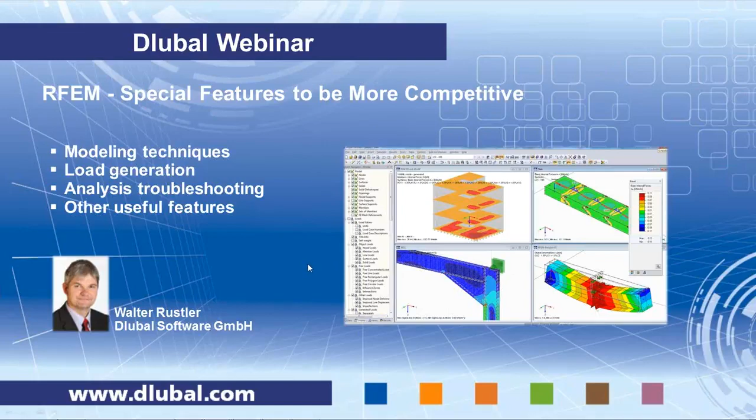With the following examples, I want to show a small selection of the special features inside RFEM. I think those features are outstanding and can increase your productivity enormously. We will go through those simple examples and show you how quickly we can model and get to good results inside RFEM. Not all features can be covered today, I only picked out a few of them. We will have time in later webinars to show you more of the features.

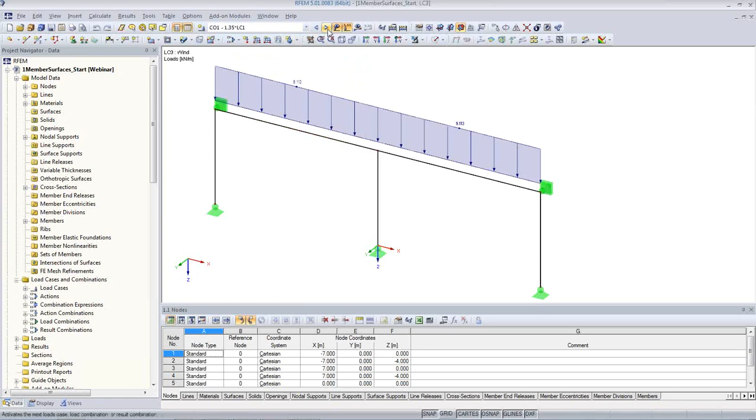It has a few load cases here, live load, wind load, and a few combinations. And at the end, we'll get an ultimate limit situation result, and we can, for example, see the internal forces.

And at the end, I performed a stress analysis with RF steel members. This result indicates a stress location here, an area of this beam where we have an overstress.

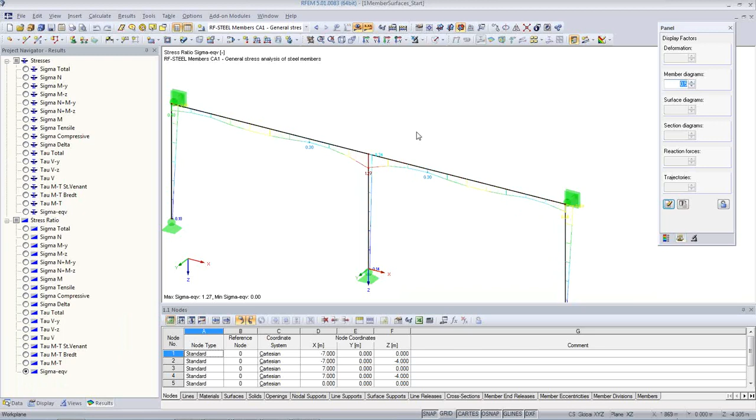I can show this here a little bit more in detail with colors. And in this area, now we have the option to increase the cross section entirely of the beam here, or we can take a closer look at this connection here, and I'd like to do this now by means of generating surfaces from this 1D beam model that we have here.

So basically we're going over from a 1D beam element into a 2D surface finite element solution. And the focus will be on how to connect the 1D beam element with the 2D surfaces and how to perform the detailed analysis here.

When we take a look at it here, this 1D element is now here only a visualization, but in reality it's only basically a line, and the beam element doesn't know anything about the details of this connection, but within the surface element we can do this much better.

So how to do this? First of all, I have to kind of isolate this section here where there is the connection. Inside RFEM, I have the option to select a member, and then if you don't know what command you have available, it's always a good idea to use the right mouse key on the selection. Then we will divide the member at a certain distance.

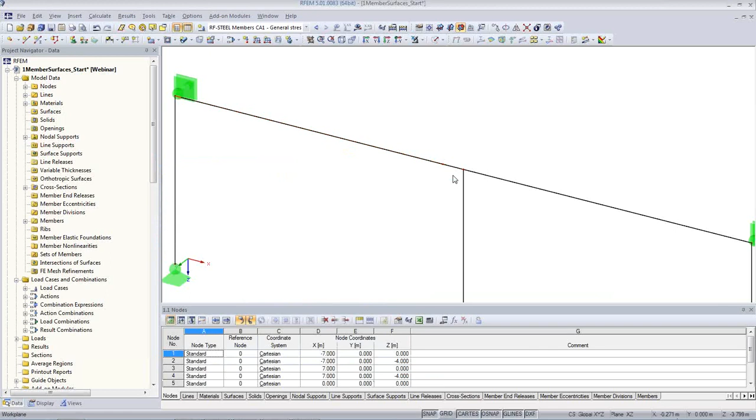Please note, while I'm doing this, I see the direction of the member in the background of the selected member, and I can see here at the member end, which is this area here, I want to have an intersection at 0.5 meters. A new node is introduced and it's automatically connected, and when I take a look at the loading situation, all the loads are changed automatically and updated, so it's also on this new member.

I can do the same thing again on the right side. This time I only have to hit the return key and it will automatically call the last command. And one more time here for the column, and I get here as well the new member.

Here we see the new members that have been created by this division process. I'm selecting it and creating a visibility by selected objects, so I just have an isolated view. Everything else is in the background and I cannot touch it or change it.

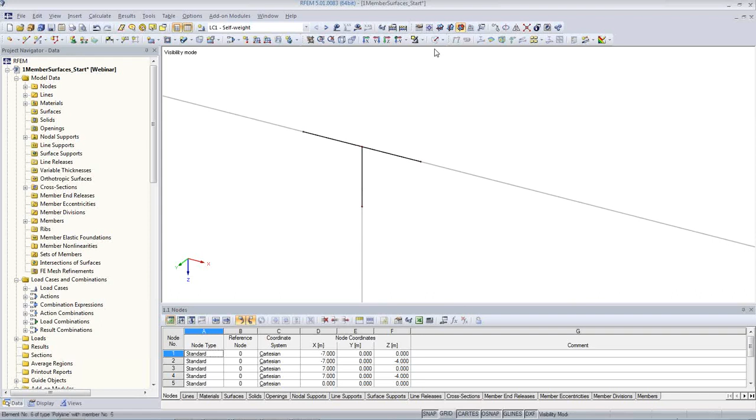In order to create a surface model from these 1D finite element members, I can use the command: right mouse click, member, generate surfaces from member. This is a unique feature in RFEM that takes the information from the cross section on a 1D member and automatically creates a 2D surface model from it. So I don't have to read all the coordinates and thicknesses of the plates from the database. Everything is automatically done and created for you, which saves a lot of time instead of modeling it manually.

Now I have the surface model, and I also see the details of this connection where, for example, the flanges interfere with the top beam. So how do I solve it? How do I modify it?

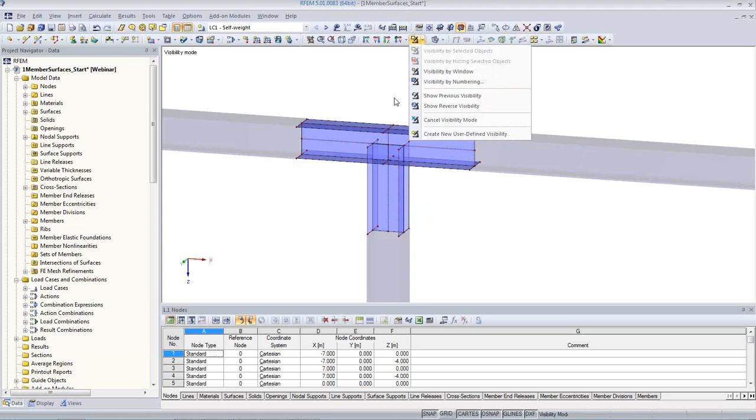I go to the wire mode in the rendering mode, and I select those nodes. First, I want to end the flanges of the column at the bottom flange of the beam. So I select the nodes and say move, or move and copy. I don't know the distance between here and here, but I can grab it from the model by clicking on the two nodes to get the displacement vector. I set the dx vector to 0 and only use the dz distance. On OK, everything is moved to the same level as the bottom flange.

If I check this, I have here Z minus 3.910, and here also minus 3.910. Automatically, RFEM realizes there's a node in the same plane and will automatically mesh it.

The next thing I have to solve is how to connect the 1D member with the new 2D surfaces. Typically it's just one node, but that's not so good because it creates a singular effect. A better solution is to have a rigid end plate that transfers the forces more smoothly into the flange and into the web.

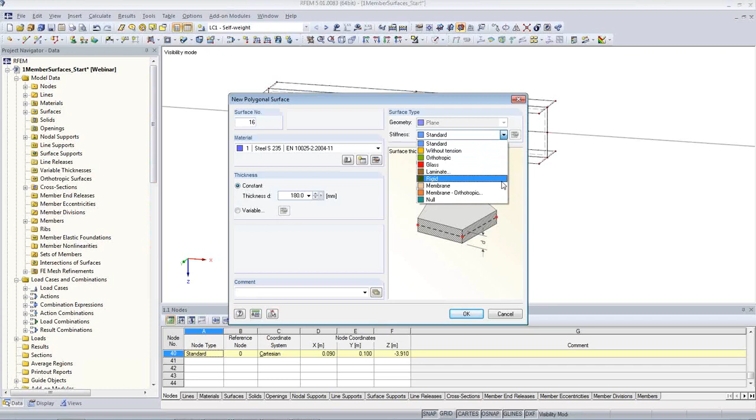So how do I do this? I simply create a new surface by polygon, which means I have to select the boundary nodes. From the surface types, I pick rigid, which is an automatic rigid plate. On OK, I can then select all the boundary nodes I need to describe this rigid surface. Once it finds an enclosed loop, it will create the rigid surface.

I do the same thing on this end, and one more time here at the bottom.

You can see a surface is marked by a dashed line inside the area. You can switch from the wire model to the solid model, or to the solid transparent display model. The transparent display model has the advantage that I can see through and grab through, for example, this web, which I cannot do with the solid model.

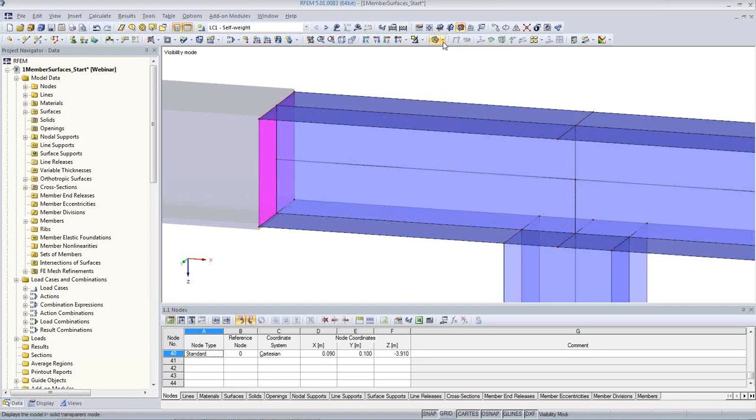It's done so that the nodes are drawn in the foreground, but basically I cannot see everything in the background. So sometimes it's better to work with the transparent model, or sometimes even with the wireframe model. Everything is at your fingertips and you can change it as you like.

I go back and cancel my visibility mode, change to the full model, and I see here we have the same geometry that's just going straight over to the surface model. By default, we're displaying the surfaces only at the center plane; we don't show any thickness.

If you want to show the thickness of the plates, you go to the display navigator, go to rendering model, then to surfaces, and select filled inclusive thickness. Then we see the thicknesses, or we can even have a wireframe around the edges, and you see we exactly match the thicknesses of the original cross section.

Okay, now we are basically done with the transition from a 1D element to a 2D surface element.

What we have to think about now is how to mesh these surfaces. At calculate FE mesh settings, you can set the target length of the finite elements, which is set here to 25 millimeters. We also have options for mesh refinements, but in general you don't really have to change anything here. The most important setting is the target length. I can regenerate the mesh on OK.

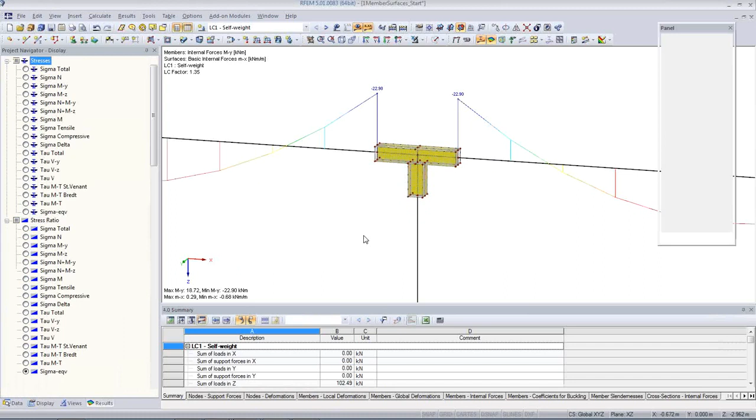Okay, with this we can try to run the analysis. I display the results, and RFEM asks me, should I calculate? And I say yes. After a few seconds, I see my results here. I see my bending moment.

I see in the result navigator bending moment, axial force, shear force, and so on. I can change the display of the diagram in the display tree, navigate to results, and say colored, which is basically the default. I also have options for surfaces. At this moment we have no more moment diagrams like we have for beams, so it's a bit more complex to analyze the results.

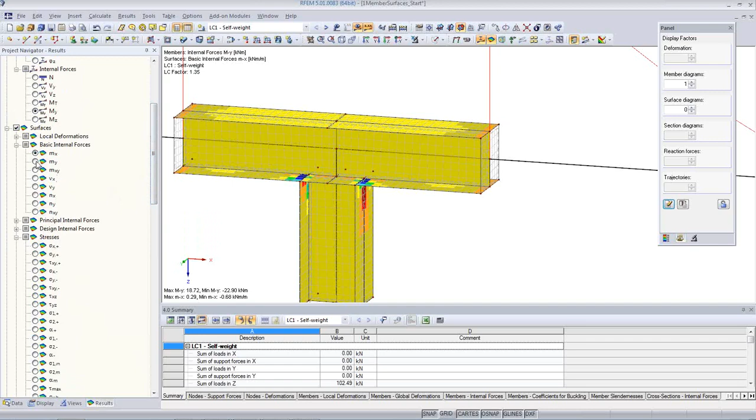We see here there is a patchwork display of the results. Which results are we seeing? It's mx, so it's the surface internal force, bending moment mx, my, and so on, and you can switch here. You can also display the stresses, equivalent stress, and so on.

So why do we have this rough patchwork display? Actually, this is not default. It's from a previous setting I made when preparing this model. Default would be continuous within surface. Let me explain that briefly.

Once we have a surface model, we have an algorithm that smooths the pretty rough results on each finite element mesh node. Each mesh node, on each corner of the mesh of the finite element, has an individual value. We're also able to grab the results at any location along a surface, so we're doing interpolation, and this interpolation is continuous within surfaces. So when there is a boundary line of a surface, we will not average the results from one surface to the other. It's important to know this.

For example, if you have a difference in thickness of the surface, and you have a stress on one side and a stress on the other side, you cannot just average out the stresses. There has to be a small discontinuity in the stresses. So we cannot just smooth everything and make average values from surface to surface. We have to control this, and there are several options.

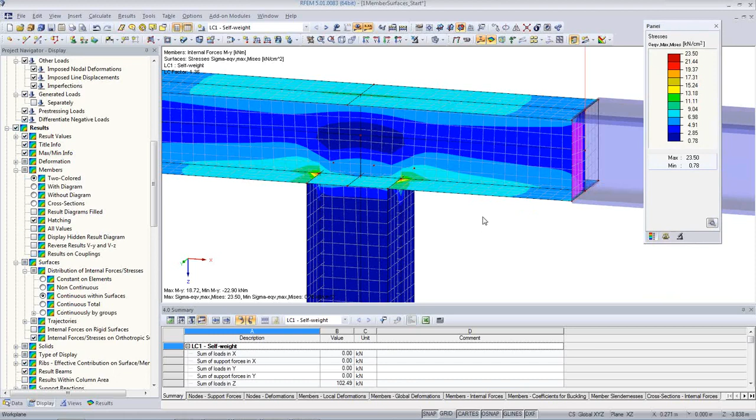I'll come back to constant on elements later because we'll have to do a plastic design and there will be some differences. Okay, let's see the result of the ultimate limit state combination. When I run the analysis here, I get the local stresses on each finite element, but this time it takes into account the local condition here.

There's a lot of pressure, tension maybe, and the force is concentrated at the point where we connect to the web. We see here there's an equivalent stress. I can go again to the stress results here. I can look at sigma x, sigma y. I can also look at the membrane stresses, for example.

So we see there's tension on the top and compression on the yellow, almost. There's also tension here, but the green is compression, for example. We can take a look at the equivalent stress, sigma equivalent max of von Mises. We see here the maximum value is 94, which is quite high for regular mild steel. We have a yield stress of about 24. So there is some problem.

So let's say everything with this blue color here seems to be okay. I can also show the local values here. RFEM has an algorithm that shows only selected values, not all the values.

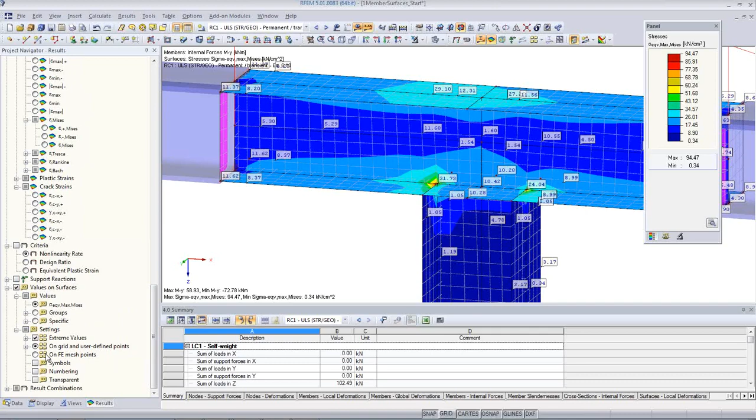If you do not take care of stuff like this, you get results on all the values, and you won't see all the results because you get so many values that you don't know which ones are the maximum or minimum. So if you say extreme values, it will give you a nice selection. You can control this very nicely and smoothly with this result option.

Okay, so it's clear that we have a problem here and we cannot say it's safe. So how do we do a plastic design? When we do a plastic design, we have to do a nonlinear analysis. It will reduce the stiffness of individual finite elements, and it will therefore redistribute the forces.

The way the software works is it compares the existing stress with the limit stress, the yield stress of the material, and then has an algorithm that reduces the stiffness and the elasticity modulus of those elements. Because we can only reduce the stiffness of the entire finite element, we cannot, or should not, evaluate the result separately in each node of the finite element.

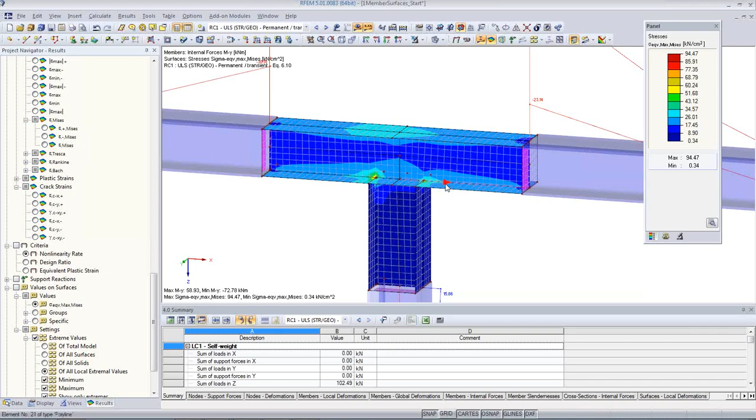We should see it as, we should average it on the finite element as a constant. So, what do I do? First of all, we have to clear and select something, and then we can edit it. Just double-click on the selection, and then we can create a new material.

We create a new material. I pick it from the library. I can choose from my favorites, which I have already here, steel and some concrete materials that I typically use. I use mild steel, and here I can choose the material model. By default, we use isotropic linear elastic, but for this analysis, I use isotropic plastic 2D, 3D. This option is available if you have the additional module RF-MAT NL.

So with this material model, I can set the yield strength and also some strain hardening modulus. The material model will analyze the strain and then set the elasticity modulus according to this curve.

So at the end, I should not get any bigger average value per finite element than 23.5. I use this material, and of course I have to delete the results.

So I can check in the view tree visually, because now I know it, but I cannot see it. Did I do everything correctly? I can use the view tree here to show surfaces by material, or you can show members by material.

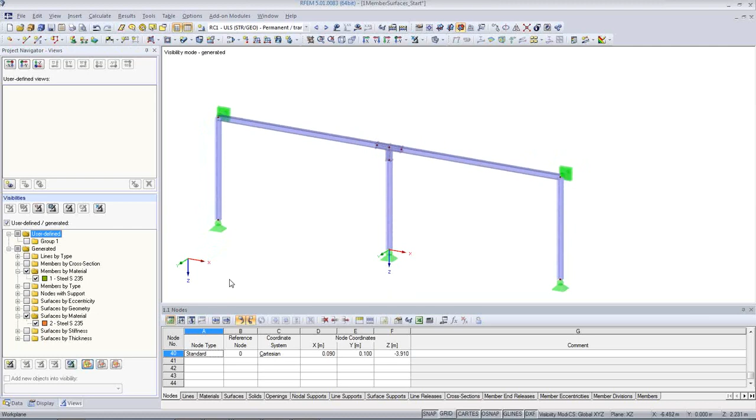Or even a better way is to use the tables here. If I select one entry, the tables are also a very powerful thing in RFEM. The selection is synchronized, so whenever I click here, I see which members use steel, the first material, and which ones use the isotropic plastic element.

If I click here, everything else is disabled because it will enable or disable the active view. I can click here, so it is disabled as well. I can only work with material number 1. So I have an option to check my input visually. Okay, it's done, and I run the analysis.

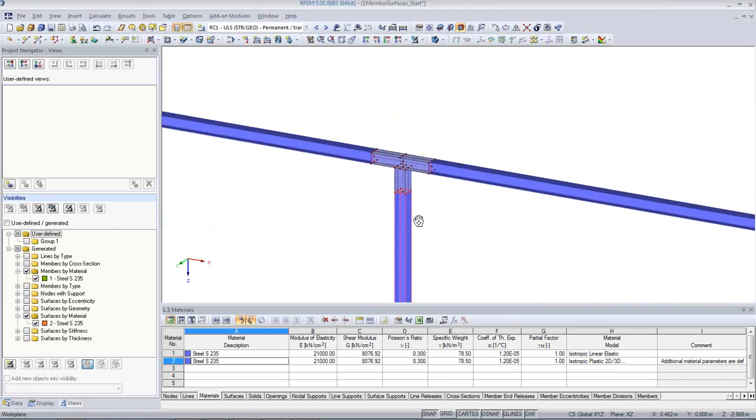First of all, I want to do something else, I forgot something. I also now have the option to, for example, change the thickness of an individual plate here. I can select it. Multi-selection is possible by pressing the Control or Shift key.

I can rotate it. Actually, to rotate, you use the Alt key. Usually when I rotate, I use the Control key and the wheel of the mouse, and I can rotate it really nicely. Sometimes rotation doesn't show what I want to see, because the center of rotation is somewhere else. If I want to rotate about a certain node, I use the Alt key and the wheel of the mouse, and it will rotate around the selected node. Okay, I've lost my selection now, and I have to do it again.

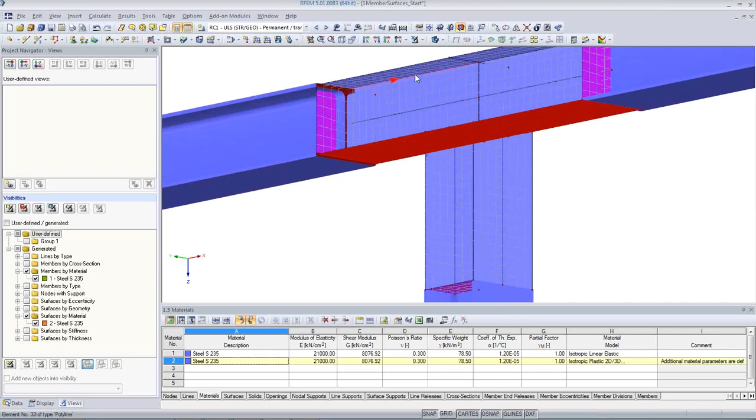1, 2, 3, 4, 5, 6, and the other 2 - so all the selected plates, I want to change thickness to 20 millimeters.

Okay, also I can display now surfaces by geometry, or actually not by geometry, by thickness. So I can hide and show certain surfaces. Let me change this by material. So if I want to see only my 20 millimeter surfaces, only those are active.

Okay, cancel the visibility and we run the analysis. Now we do a plastic analysis, so there will be a few more iterations. You can follow the iteration process, you can see how many iterations are here. It's all also in a log file, so you can see it in the printout report if you reach convergence or not, or how many iterations have been done.

You can also see a small diagram that shows you if there's some problem - is it moving away, is it converging or not. Everything can be recorded and printed afterwards.

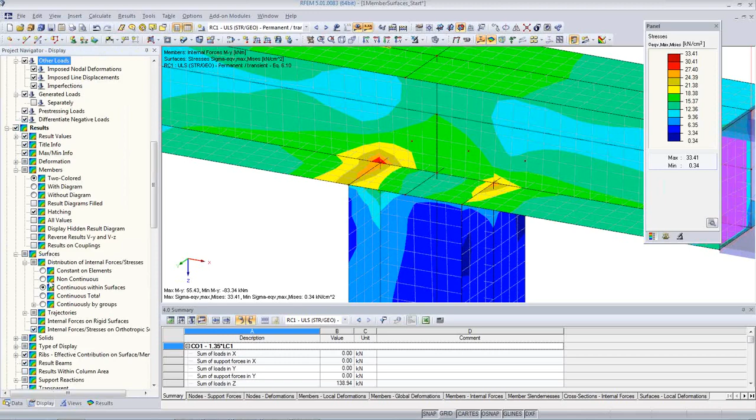We see here now the results, and I'm interested especially in the surface results. We see the equivalent stress is drastically smaller, but as I said before, because we are reducing the stiffness only as a constant per finite element, we should look at the results only in the distribution constant by element.

So if I see this, then I have 23.49 as the maximum sigma equivalent von Mises. We see here the red areas where we have actually the stress. It's a slightly bigger area than we saw beforehand, where we thought there was an extra overstress. This is due to the redistribution of the forces, because we now have also a different stiffness through the plastification.

Also, I can take a look not only at the stresses, but also the strains, because I have to make sure that I do not have endless strain in the material.

The material can take only a certain amount of deformation, so I have also to know the strains. Here I see the maximum values of the strains, and it's 0.1% for the maximum here in the red.

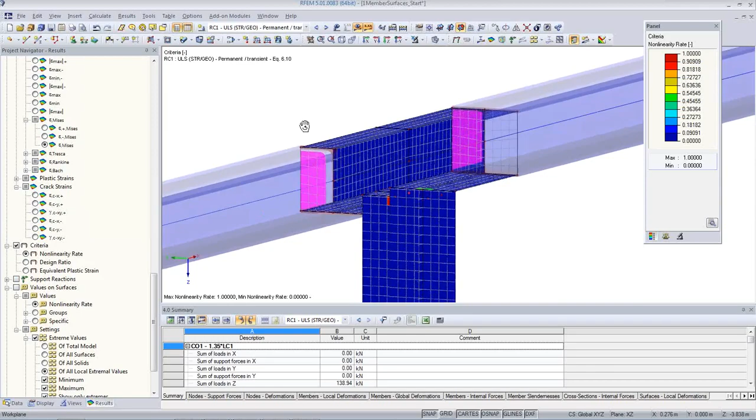Also of interest is the so-called non-linearity rate. I want to see the elements that use non-linearity, that are plastifying, so I can show this also by this criterion. If you want even more condensed results at the points of interest, you can create a mesh refinement and condense the results even more there.

Okay, I think this is it for the first example. My intention was to show you first how quickly we can model the transition from a 1D element into a 2D surface-based element model, and how quickly we can do a plastic design. It will help you do a more safe design, and will limit the use of material only to where you actually need it.

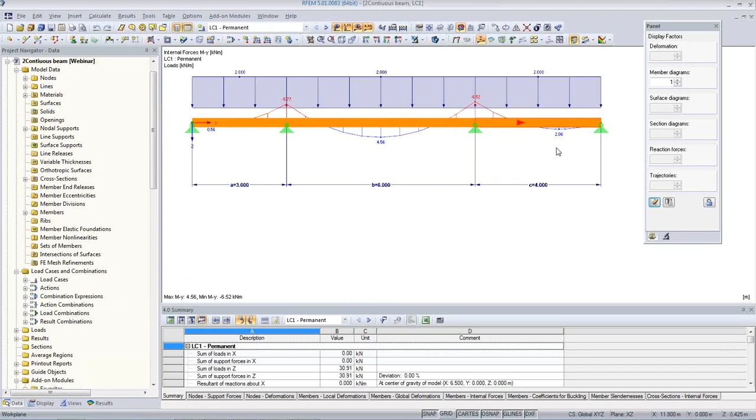The second example I'm going to show you now is maybe not so much a breathtaking example. It's a continuous beam, and it consists of 3 members, has 2 loads—or actually 4 load cases—and several combinations. Also, I have a design case in the additional module RF Timber Pro that allows you to do a design of timber structures for beams according to Eurocode or other codes, including stability and capacity checks.

And when I take a look at it, we have a maximum design ratio of about 95%.

Okay, why am I showing you this? Well, RFEM is a very powerful, large program, typically used for frameworks that consist of maybe many thousand members, or many hundreds of surfaces and solids.

Typically, people often use individual programs for this type of structure—small, parametric ones that just do this job and nothing else. What you have to do is buy a second program, work with a different vendor, work in a different user environment, with a different look and feel of the software and of your printout report.

I want to show you how you can also handle such structures quickly, and not only such structures, but other small problems you have inside RFEM, because this model has some intelligence inside.

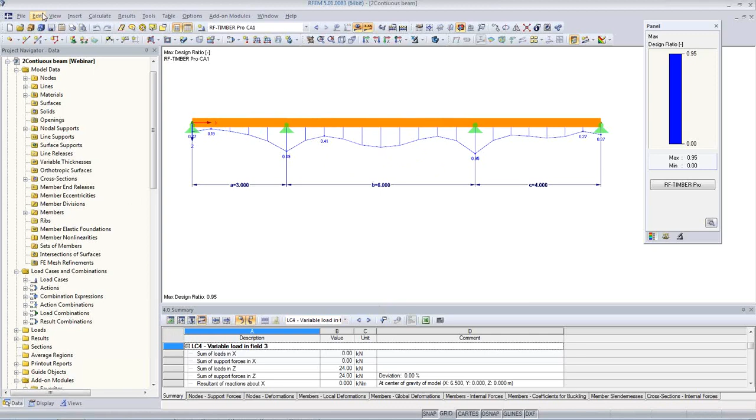I go to edit and edit my parameters. This model has parameters: A is the span A, B is span B, C is span C. I have self-weight and live load.

If I go back and go to some results, I see my loads. So now I can use those parameters and change them. Go, for example, to 5, maybe let's have 8 at the end, and a few different loads. I press apply and everything is updated.

Maybe the span at the end is too long—I want to have it maybe not 8 meters, but some different distance. Then I can change it quickly and update everything.

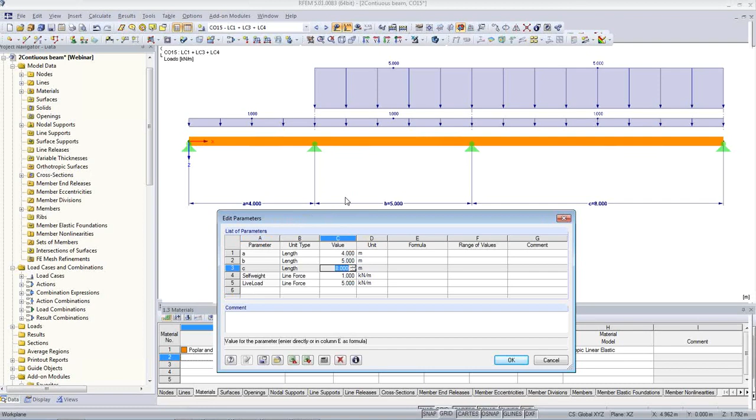Okay, now there is some saving going on in the background—just give me a second. So here we go. I can put it to 6 and update it again, or the load maybe to 4 and update it. Notice the value will change here. That was the wrong button—4, update.

Once I have this done, I can calculate everything and everything will be updated, including my concrete and timber results, the internal forces, and everything else I've prepared.

The good thing about this is I also have a printout report in this parametric model. So I set it up once, then change my parameters, and within a few mouse clicks I can change it to any continuous beam that I want, and everything will be automatically updated.

If I go to the data navigator, I can find my printout reports, and in this printout report I have a shorter and a longer edition. If I open the printout report, it consists of 11 pages with the most important pictures and tables automatically prepared.

I can go and select view, zoom 2 pages, to see it a little better. We can look at the support reactions, and pictures will be updated with the current result. Also we see shear forces, bending moment, deflections—everything you can select, all the details are here, and here we have our utilization ratio. So very, very quickly, if I want to change it, I close it.

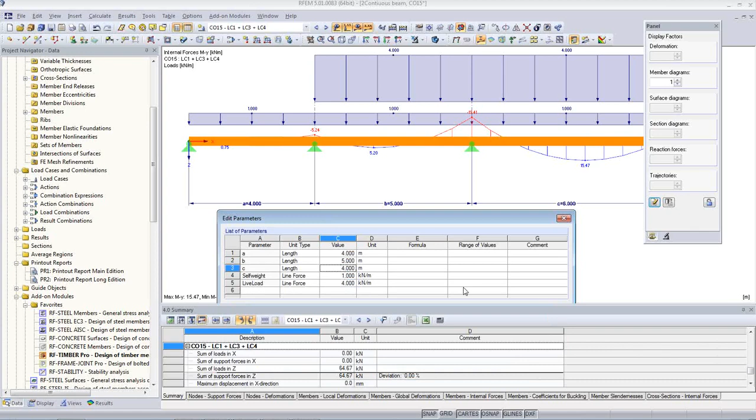Oh, something else is wrong. I want to do my parameter, I change it, and I say okay, let's go back. C should be only 4 meters, and this should be also okay. I click OK, calculate all, and everything will be updated, and I can take a quick look again at the printout report. It will also be updated. So very quick way to modify the structure to make things parametric.

Next, we'll take a look how to make such a parametric model, and you will see it's a very simple thing, and you can quickly do it also yourself and learn it yourself.

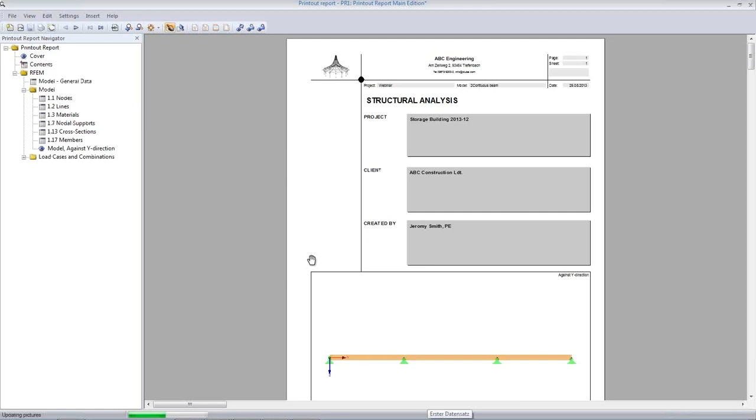Everything what you see here, all the technology is included into the main RFEM program, no additional module needed. So you get this, when you buy RFEM, you get this parametric modeling automatically with it. So there's a lot of power that's extra inside RFEM that people sometimes don't even know about, and I think this is a very, very good advantage for you working in your office.

So we see now we have the updated model. Somewhere I think I have even dimensions, and we see here there is 4 meters only. We have your member numbering and so on. Okay, how to create such a model?

Quickly, I create a new structure. I want to have it in a 2D, as a 2D model. So the RFEM 3D allows you to work also in a 2D environment. And I call it one continue.

I can now manually draw such continuous beams, or I can use another tool, generate models, continuous beam. Also standard content of RFEM. You can set here the number of spans, you can set here the distances.

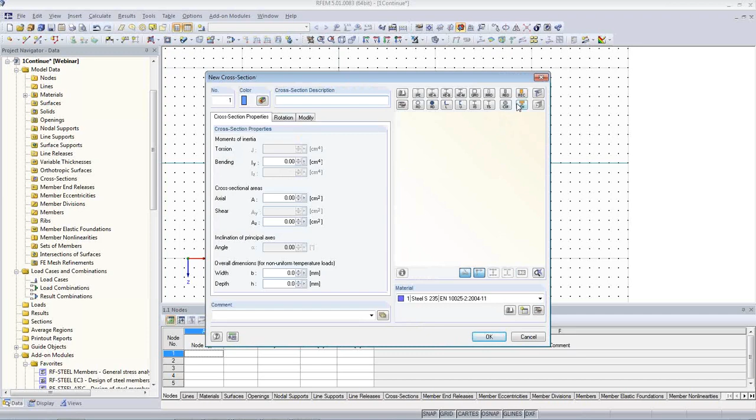I want to create load cases, self-weight, load magnitude 3 kilonewton per meter, variable loads 5 kilonewton per meter as a default. I want to create a cross-section, so I can choose here from the cross-section type, rectangle, and we say here 300 millimeters by 500 maybe.

And also I'll choose from materials that I have here. Some is already prepared here. You can change it, go wherever you want to, and use whatever type of material you have. It comes all with the software.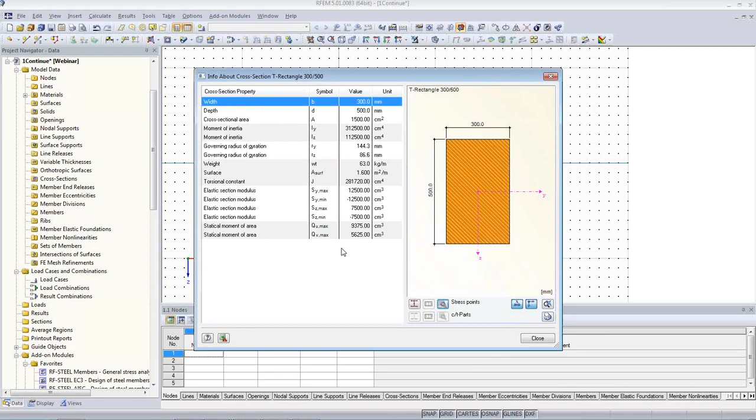Additionally, I also get all the cross-section information. I can see all the stress points. Everything is clear visually there. You can print all those things. You get all the details that you need, and not only the geometrical information.

Okay, on another okay, I get here my continuous beam. I hide the grid because it kind of is disturbing me. I see here the loads, my load cases, and so on.

When I opened the structure, I decided to create a standard, according to standard load cases. So we use here, for example, Eurocode, but we also have other codes, American codes, British codes, Chinese codes, Indian codes, and so on. And we can here then set the national annex if available, and we can automatically create combinations, load combinations.

I choose this option here because that will make my life more simple. I go to the load table here, and I see here that we have our 4 load cases. You see here everything is also synchronized, so whenever you click on it, you see automatically what happens in the graphic here, and you know exactly what we talk about.

We can create automatically load combinations and see here the load combinations. Actually, I forgot to disable here some combination expressions. I only want to have the combinations for ultimate limit state. So altogether we have 8 combinations, for example, that are possible.

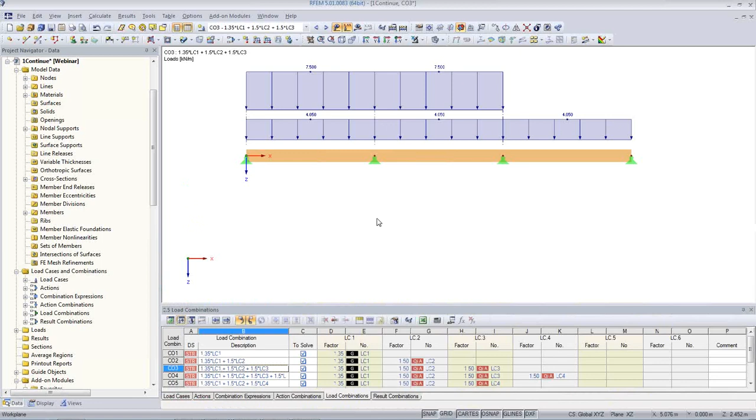Okay, it is created. You can do this with any other model. You don't have to do a continuous beam. This way you can manually change everything. It is possible to manipulate things. You can say here, okay, I want to have it 16, no problem.

But how to make it parametric? Well, first I need some parameters. If you are in the structure table, model data, you find here the button edit parameters, or you find here edit parameters. So I define my first parameter.

Then I say span 1. It's of type length. It should be maybe 3 meters. Span mid should be also of type lengths and 4 meters. And span 2 also of type lengths, 5 meters.

Then I'd like to have load case self-weight. This is not of type length but of type line force. By default it should be 1 kilonewton per meter. And live load, also line force, maybe by default 3 kilonewton per meter. Those are the parameters I want to choose from.

Fine, I say OK. Now I need to change the coordinates depending on the parameter. If I want to change a coordinate, I double click on the node. Here I have the actual coordinate in X now. If I click on the right corner here with the little triangle button, I get further options.

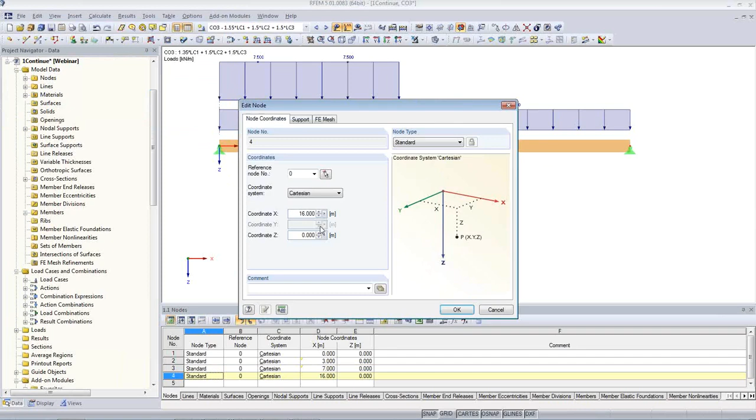Okay, 3 meters. The next coordinate, quite simple, same way: edit formula, span 1 plus midspan, 7 meters. Okay. The third coordinate, 16, a little bit much. Edit formula, it remembers the last input plus span 2.

Everything follows. If I want to change something now, I can test it out. Let's make it 4, make it all even. 4, apply, it works. Hooray.

We can also draw some dimensions here, so we see that we are doing it correctly.

Okay, what is left are the loads. So I'll choose one load case. I select my loads, double click on the loads. Here I have the same buttons, edit formula. It should be my self-weight. Okay, and then I go through the other load cases.

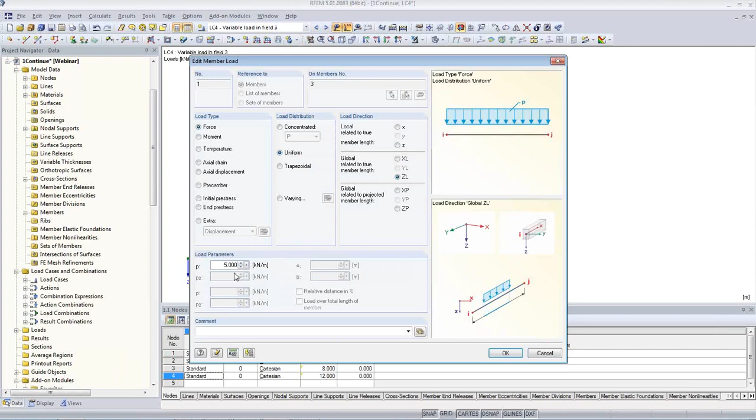Now I have to do it a little more often because I have 3 load cases. Live load, okay. One more. Edit formula, it's already there, I just have to confirm. And the last one. Okay.

So this way I'm done and I can change my parameters. See how it works? So 5, load case 2, load case 5. You see here it changed because in this combination we have 1.5 times load case 2, so 5 times 1.5 is 7.5. If you want to see the real value, you go here and select the load cases without safety factors. So everything seems to work, and we have done our parametric model.

So if I want to do this 2 and 2, okay, done. Calculate all, everything will be analyzed and calculated and updated. If I prepare my models one time, I can quickly change them in the way I want, and it's a very powerful thing.

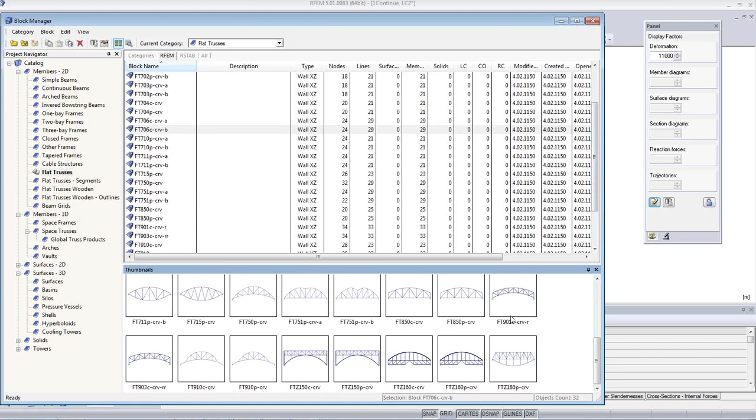In fact, you do not have to do everything yourself. When you buy Dlubal software, you get a tremendous amount of already parametric sections and parametric structures with you. You can change things. There are all kinds of structures here, we have space frames, we have global truss products, prepared parts that you can buy on stock from manufacturers of stage constructions, for example. So they are all parametric. If you use this, we have to go back to RFEM.

If I open something like this, for example, it will open in a preview. You see here, I can change the length. I can even show the parameters. If I change the length here, you see how it will change. It's all parametric.

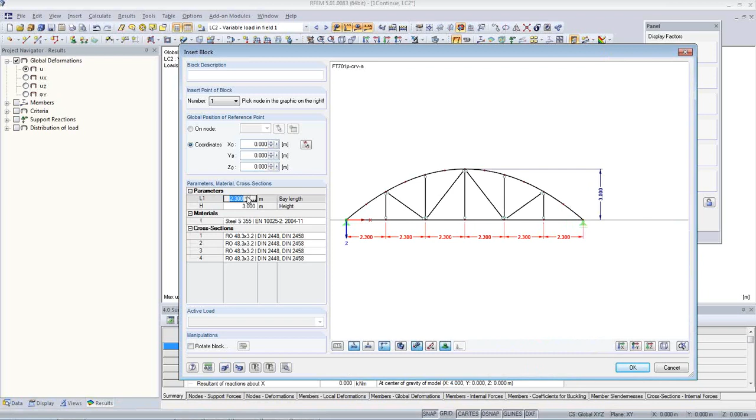And you can import these things into your existing structure. So I can say I want to glue it onto a node on an existing structure, or with some spacing in between. You can set the cross sections and so on. So it's a very powerful thing that already comes with RFEM at no extra cost.

So with a big program, we can make a very effective analysis of a small problem. We'll see more about parametric modeling later. It's a very flexible way to analyze things, and basically you can customize RFEM with individual modules or generators, if you want. The next example I want to show you is about intersections.

Also a great example of how powerful parametric models can be. What we see here is part of what could be a larger truss. We have here a pipe cross section and a couple of struts that connect to the main beam, the main pipe. It's a surface model, not a beam model this time, and it's connected here, so it has the intersection line exactly where the one strut connects to the main pipe.

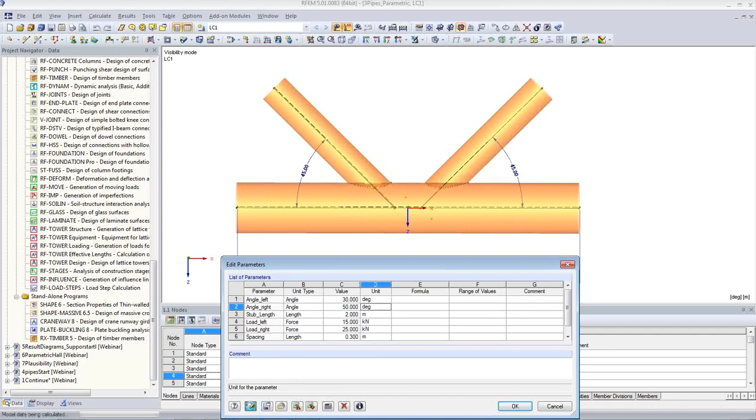So I can apply the changes and you see how it changes. The clue of the whole thing is that it also updates the intersection of the two cross sections. Also, if I change the diameter, you have to do it a little differently: right mouse click, edit component. If I change the pipe here to 0.4 meters, for example, it's intelligent and will automatically update these intersection lines. It's a very powerful thing, an intelligent object.

Next, I will show you how to create such an intersection. I have prepared, to speed it up a little, a small model that only has now the center lines of those pipes.

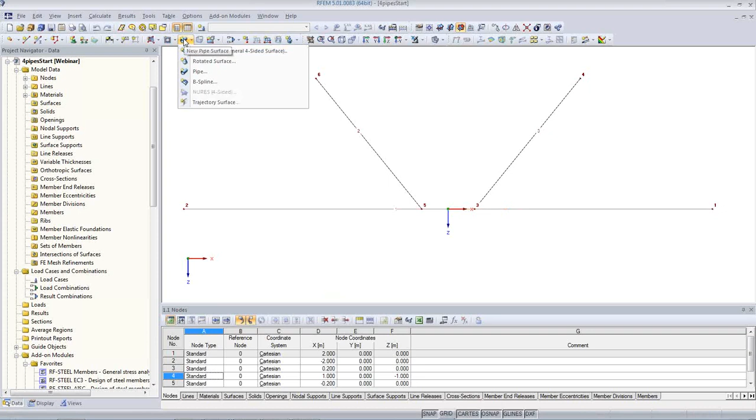How to create pipes? First you have to have the center line, then choose from this button line here, pipe. Material, I chose steel again. Thickness, I set 10 millimeters wall thickness, and then I go to pipe here and set the diameter. I can use 300 millimeters. Now I just click on the line, and automatically it will create the surface here, and you have the pipe as a surface model.

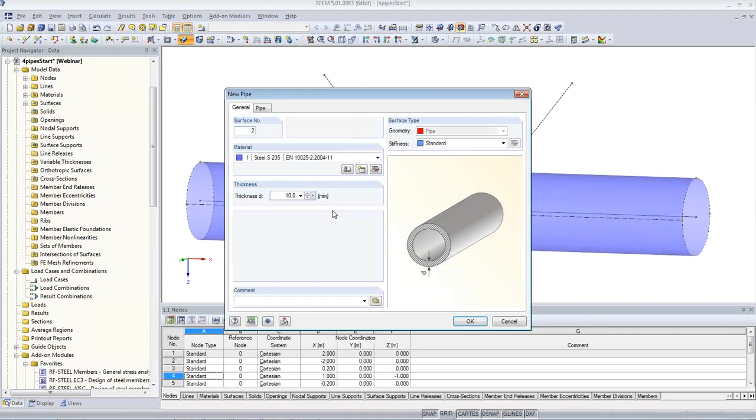Next, I'll do the other two pipes the same way. This time I only choose a little bit smaller, 180 millimeters, for this one and this one.

Now I have the parent objects, the two surfaces, but I don't have yet the intersection line. How to do this? Quite simple. As I said at the beginning, if you don't know what to do, use the right mouse key on the selection. I want to do something with surfaces, I want to create an intersection.

And here we are, we see the intersection lines. But I want to get rid of the internal part of those struts here. So how to do that?

Well, this time we work with the navigation tree on the left. We go to the data tree here. I want to do something with surfaces, so I check surfaces, and here we see components. If I click on it, I see right away where I am at. So it's very powerful, very important to see what is selected. Pipe 10, 11, 10, 12 doesn't say anything on its own, but if you see it in the graphic, you know exactly where you are. Now you see here active, and I can obviously deactivate some things.

This part I want to weld on the outside of the main pipe. This one I want, but not this one. So if you don't know what to do, right mouse click, deactivate component. This one I need, this one I don't need, deactivate component. This one I need. Now I can rotate and look through. Everything seems to be okay. I can also take a look in here.

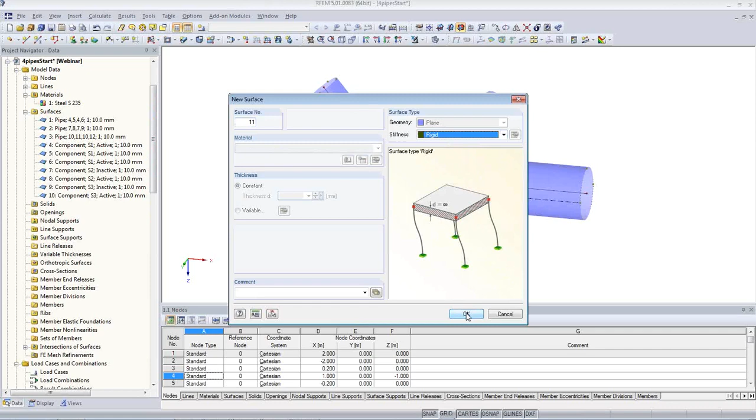This time I select boundary lines. Again I select rigid of surface type, and because I select boundary lines and there is only one, I just have a single click to assign this surface. Now because I have a connection between my center node and the wall of the pipe, it's easy for me to create a new nodal support. I use a new type, fixed in all directions, restrained about X, and I just assign it to the individual nodes.

If I want to, I can create some load cases. I'll use my self-weight, which automatically calculates the self-weight of the structure, and then I run the analysis.

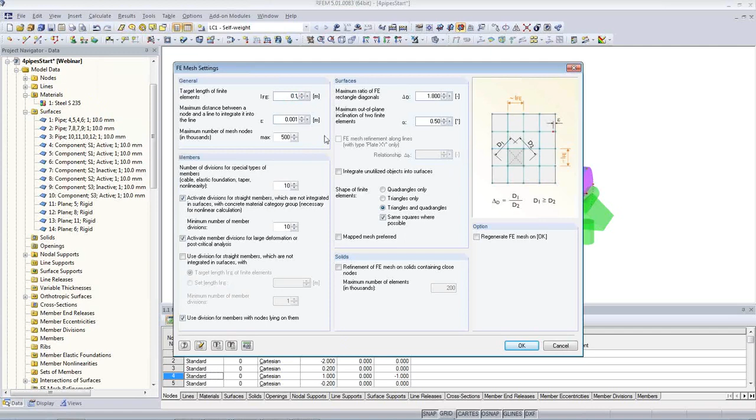First of all, I can't forget to check the finite element mesh. I go to my element mesh setting. Here I use maybe 100 millimeters as mesh target length, and we calculate and generate the finite element mesh. We can see here, we'll see better when we have the results.

We run the results. It's a linear analysis by default, and we get here first the deformation, which is very small and therefore not impressive. But we also get the surface internal forces. We can again display the stresses, and we see here where we have the problematic zones, and everything can be analyzed again as before. So a very powerful thing.

I do not do the parameterization here, we have seen that before. Important to know: we can do these intersections, and it does not only work with pipes—you can intersect any free form shape with another one. If you change any of the parent objects, the child objects and components will follow, and you don't have to recalculate your meshing and everything. Everything will be automatic. So a very intelligent object, very simple to handle, and very flexible.

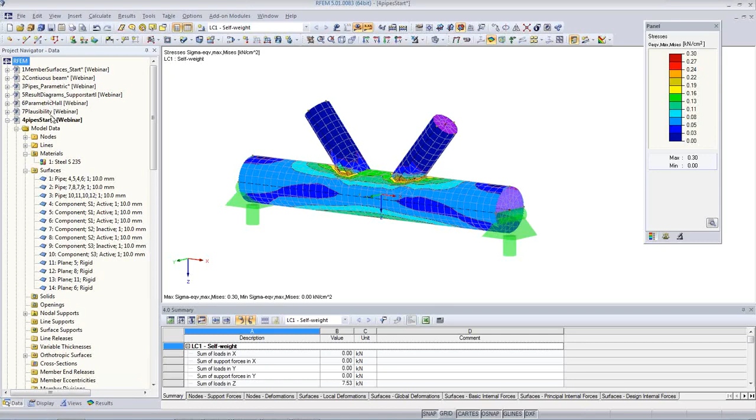So I'm looking at this model here now, which is a simple plate made from concrete, thickness 200 millimeters, and I have here some point supports at different distances, grid arranged, kind of.

And when I run, I have a couple of load cases again. Doesn't have to be many, it just needs to be showing the principal work with it. So there's self-weight and then there's a live load, and I have a few combinations, this time linear. Ultimate limit state results are, for example...

We can see here the mx value, my value, and so on, or we can take a look at the deformations.

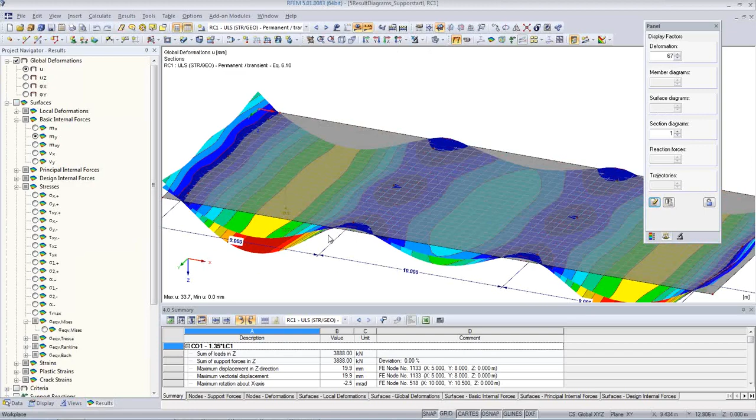What I like to point out is a typical problem, which are singularities. And if I take a look at the equivalent stress or forces, then you see here everything. There's high concentrations of stresses actually here on those points.

So first of all, how to find singular points, how to find problematic points. Well, typically it's locations where there are high stress gradients. So if you make the mesh dense, you will get an infinitely high value, and it's very steep. You will have a very steep angle, the change from one finite element to the other one.

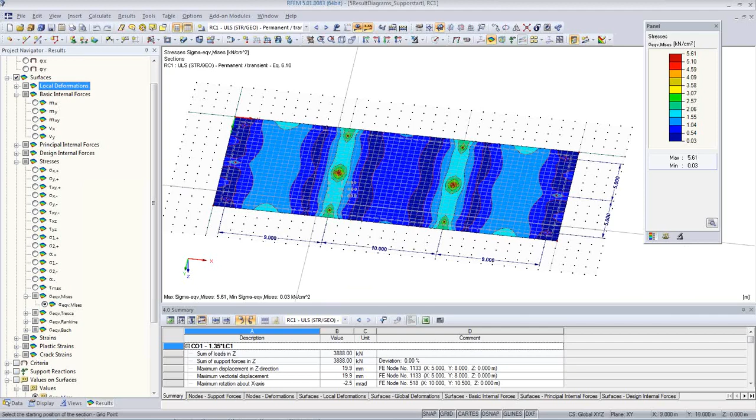I can show you this. For example, if I make a section, a longitudinal section. Let me do this first. Create a new longitudinal section, and we do this from here to here, and we see here now the results.

We see here a result diagram, which is also a very powerful feature in RFEM. You can choose which type of result you want to see, for example bending moment in one and the other direction. You can also choose your load case you want to see.

I call it mid. Okay, you can see here the values are. You can see the results here on this section, in the center here.

I'll make it a little bit nicer for you. In the display navigator, you have the option to set all the settings for the results here. And I want to see not differences, I want to see isobands and not those values.

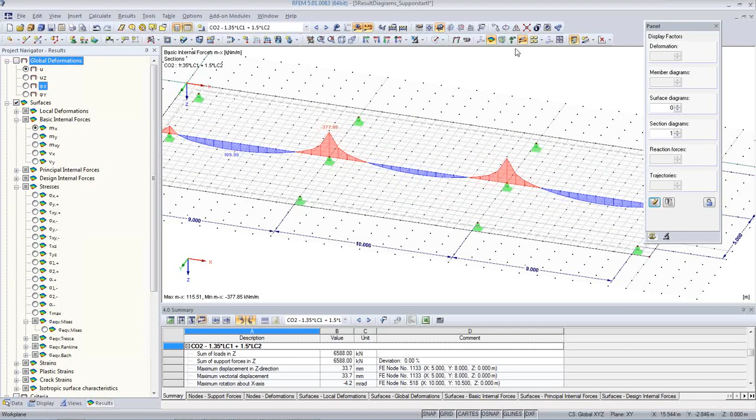How to find, sometimes it's not clear where there's a singularity, how to find it. Well, you first have to select a stress as a result. Let's go to sigma equivalent, and then I can show the differences, which is basically the stress gradient. And it will visualize me where we have a very high gradient.

So the stress gradient, where it is red, is 60%. So the increase from one element to the other one is 60%. So it's a location where there is a lot of increase in these values, where we have those peaks.

And those are typically the problematic places. Here it's clear because it's a point supported slab, and where the point supports are located, you see the singularities. But in other structures it's not so clear, but you can find it in this way.

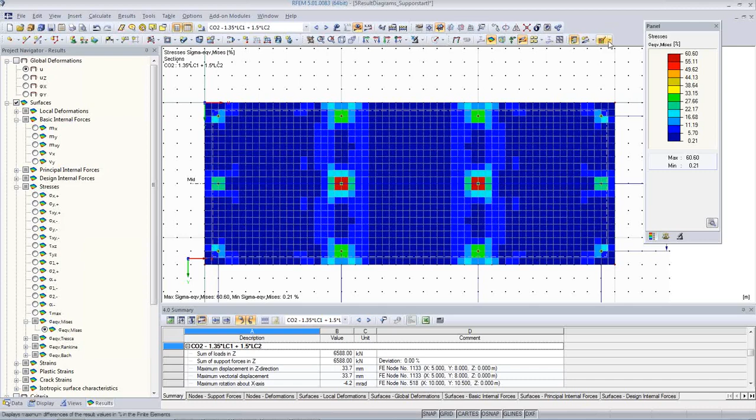Okay, how to handle those things? I go back to isobands and I change it to mx maybe. How to handle those situations? Now, how to handle singularities?

There are two ways, and I'm going to show you the two options we have. First of all, we can do the following: we can select one node here, and I create a new support type.

Here I create an elastic support, so everything which is rigid is not good. So if it's elastic, it's better. But how to find out the elasticity of such a support?

RFEM has a tool that allows you to calculate such stiffness from the geometry of a column. So we have, for example, a circular type, diameter 500 millimeters, length 5 meters. We can choose the material, and we see here automatically the spring constants for this column.

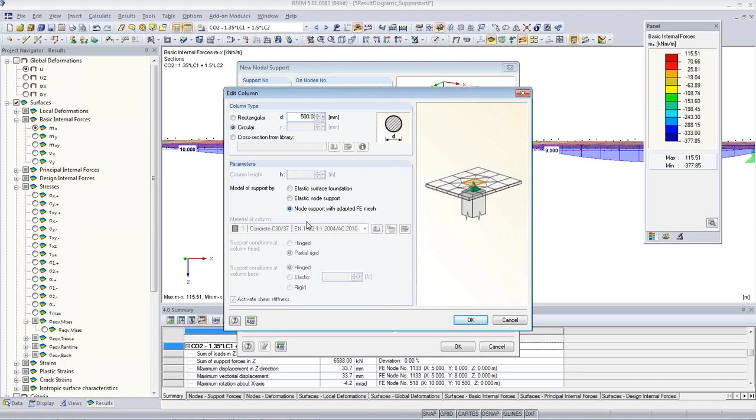We have the option to have elastic surface foundation, so the model internally will be an elastic supported surface. We can have an elastic node, so it's a point support but a spring constant underneath, or we have a node with adapted finite element mesh, so it will also kind of narrow down the result around the column with the finite element mesh change.

I stay with the last option because I think it's the most effective one. But it's up to you what you choose. I click OK and OK again. Of course, we need to delete the results. And we see here we have one area where we have a different support symbol. I'll run the analysis.

And we'll see the difference. First of all, the results are hidden inside the column because we assume those results inside the columns are not so relevant. It's standard practice to make the design at the edge of the column, so we get the values at the edge of the column.

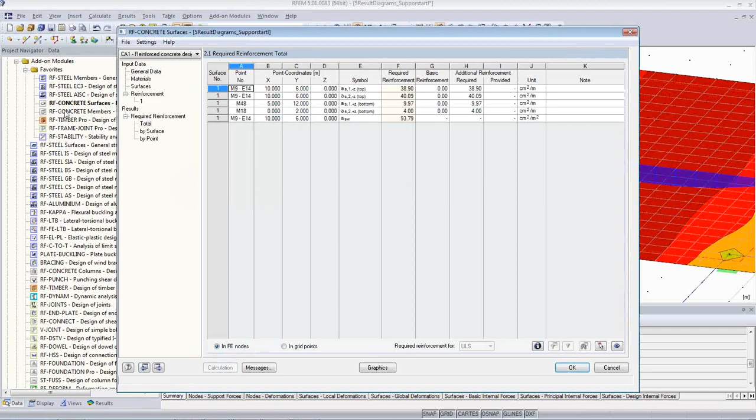Also, we can compare. I made a concrete surface case here, which I didn't explain yet. We did a design for concrete in the module RF Concrete Surfaces, which analyzes the structure according to, for example, Eurocode, and I get a reinforcement for this structure. If I do this, I can look at it graphically. I can see RF Concrete Surfaces and get a result, hiding the other values. I get a result value of 38 centimeters square by meter on this peak.

And only 22 on this peak. So you see, with the modified support, I reduce the needed reinforcement result dramatically. So this is one way how we can handle this problem.

The next way to handle this problem is called an average region. In RFEM 5, this is a new feature. I can enter average regions here. If I create a new average region, I have to enter a name and select a surface where I want to use the averaging region. I can select whether it should be a rectangle, a circle, or an ellipse.

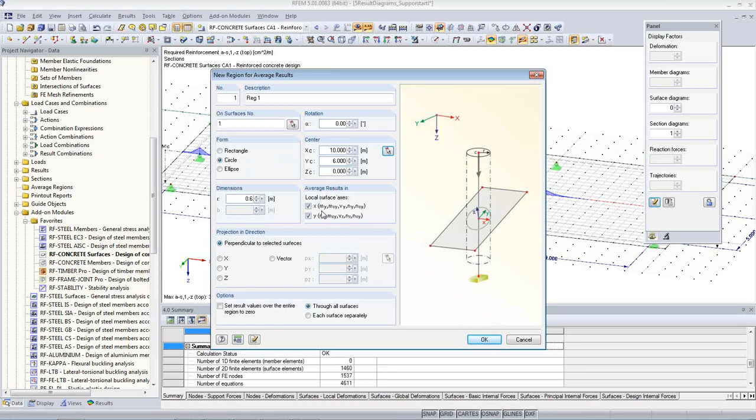I'll stick with a circle and place it right above this support. For the dimension, I'll choose about 2 to 2.5 times the thickness. So with 200 millimeters, maybe 3 times, that's 0.6 meters as the averaging area around the column. I will average in both directions. I click OK, and we'll run the analysis again.

You see we had something like 36 or 38 square centimeters. Now we have only 30. I'll explain a bit more because I have to go into the other direction. So this is reinforcement in direction 1, reinforcement in direction 2. You see here the average impact.

Basically, I can show and hide the averaged results. Let me go back to the combination. Hang on, combination this way. Data, results, sigma x averaging out. Okay, sorry, one more time. Calculate all.

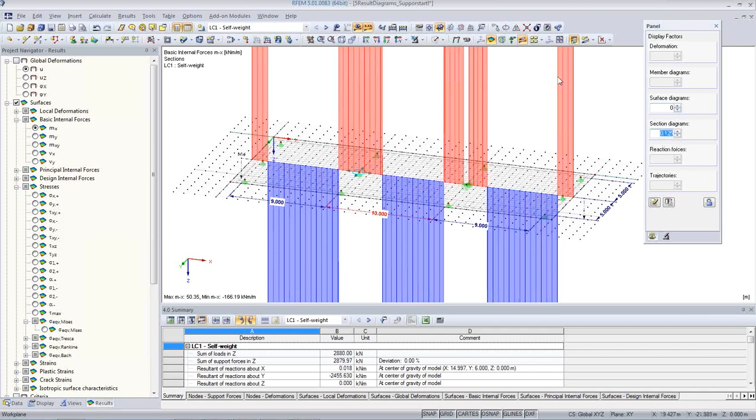Okay, this is something I didn't want to see now. I'll need some more stresses, bending moments. Let's see what happens now. Where are my averages? Surface diagrams. Sections. One more time. Isobands are here. Averaging. Averaging display. Here we go. Average region in and out.

So now let's see the result one more time in the sections. Display sections, all values. Sections, here we go. And if I show the average region, there's no difference now because I need to average in the different direction.

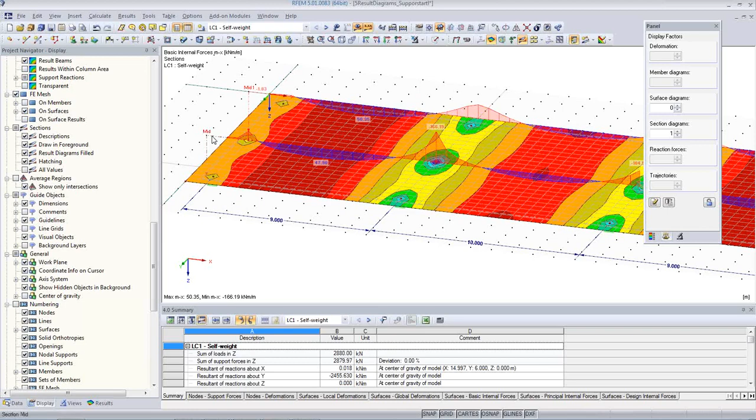I'll show you one more thing regarding the result diagrams. Those are also objects that I can move and copy, and we'll come back to averaging after that. I press the left mouse key, then control plus the left mouse key, wait a little, it will copy it, and then I can drag and drop it to the location I want.

For example here. Same thing, I can create a new average region in the other direction, a new result diagram in the other direction. You see here the result course again. I save it and call it A in this case. And it's in the other direction.

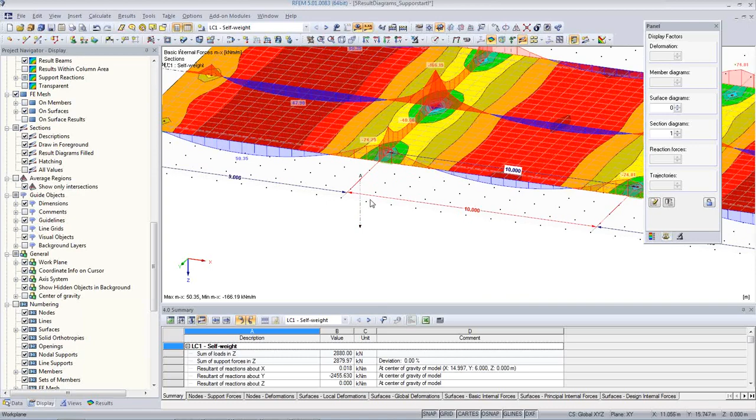Again, I'll copy it a few times from one location. First select it, then copy it from here to here. Something didn't work. Sometimes if you have trouble, you can also do it this way: select it, say copy, one copy, and copy it from here to here, for example. It's an object like anything else, so you can copy it from one end to the other.

Now I'll try it again one more time. Copy, and I move it to here, for example. You can edit it and say it should be at 5.5 meters, and it will be exactly where you want it.

So actually what I wanted to see here is this result. I'll go back to zero, and now we show the average region again. Self-weight—let's go to the concrete results. In concrete itself, you have to also select in the details that you want to design the average internal forces. The sign is here. Okay, and I run the analysis again, so I used the smoothed results, and then I should be able to display them here.

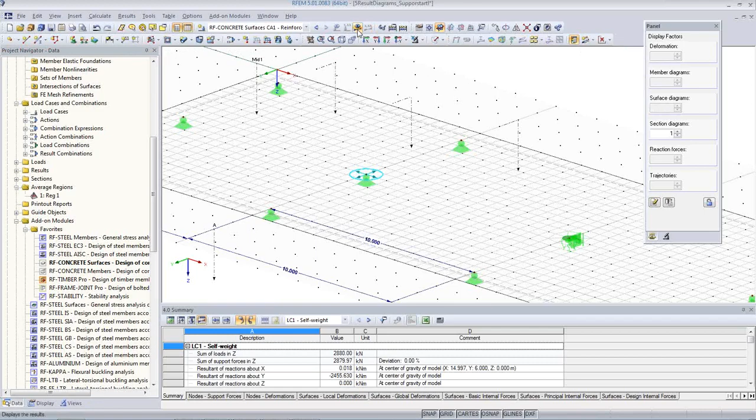Results. I need now ISO bands. Here we go. Now we see here the averaged results in RF-CONCRETE. So from 38 to 27, we have a tremendous reduction of the average result.

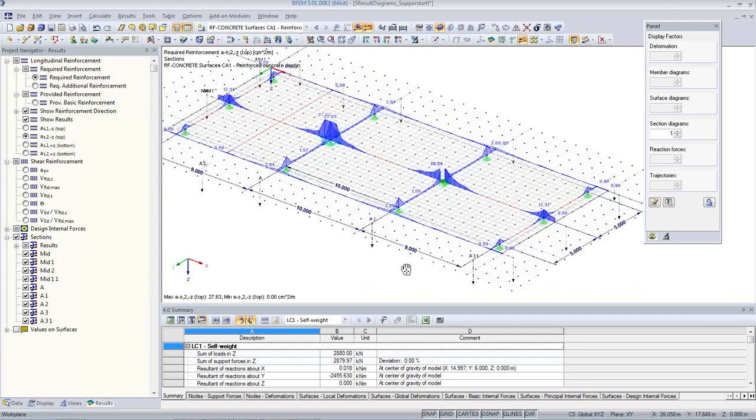It's also a good thing how to make a documentation with these design sections, with these result sections. Let me copy one more time from here to here, and maybe also here. So instead of displaying the internal forces, you can also use this display as a good way to display the results.

For example, I go back to self-weight. You can use this, or you can use ISO bands, or you can also show nothing and use only the sections. I can hide the grid, and this way I have also a nice way to get the documentation of the results.

So I print the graphic, for example, as a mass print into the printout report, and I can select I want this result, this view, for all those results, MX and Y and so on, for all load cases. 50% of the page should be used for one graphic, and I will open the printout report after that.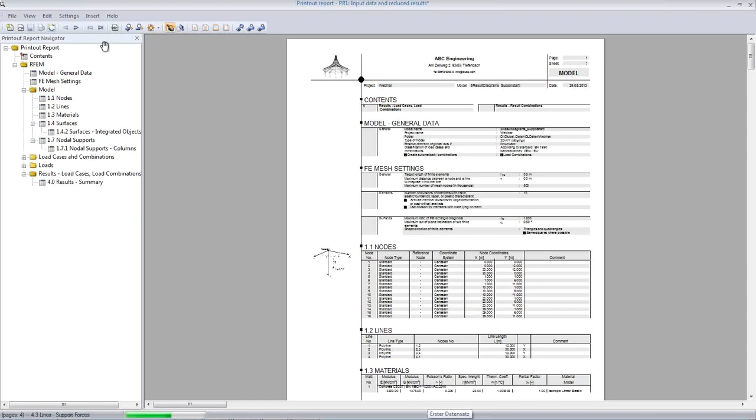I'll open a new printout report, and it will give me the results nicely prepared, with a nice set of graphics that I can look at, and 2 graphics on one page. It takes some time to update the pictures, but now you can see how nicely everything is there, and you get all the peak values correctly, not everything just written above each other, so it's really nicely prepared, automatically.

Also a feature that saves you a lot of time when working with it. I accidentally put here a dimension. I can delete it, for example, and it will be gone then also from the printout report. Everything is updated automatically.

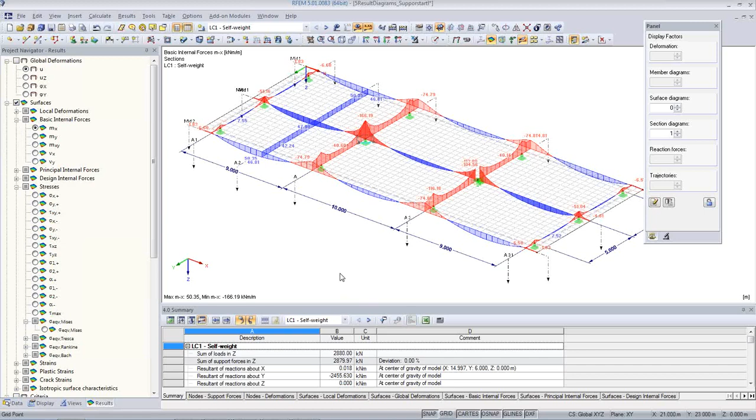Okay, this was how to work with result diagrams, how to use them for printing, how to handle singularities with the column feature as the point support, and with the average region that I've been showing to you.

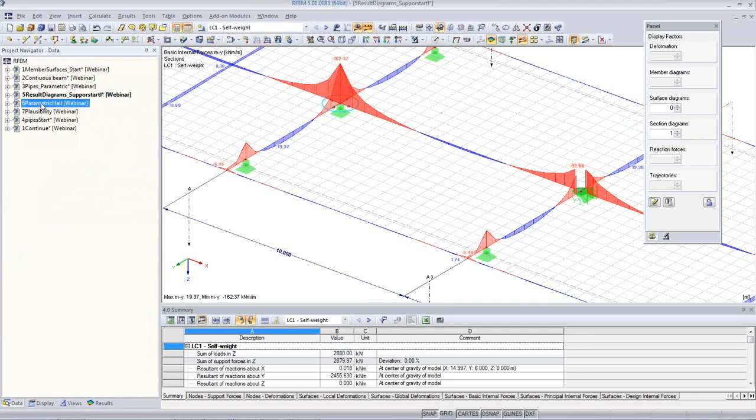Next, I'd like to show a few more things regarding tracking of problems. I have prepared another model. Again, it's parametric, and this model is a steel hall. I've made it completely parametric.

You can edit the parameters here, and you can say, okay, spacing 6 meters should be 7.5, 5 meter 80 should be 6, the angle of the roof should be 20, and I can update the view. Everything is parametric, since we have load generators for snow load.

Self-weight, snow load, wind load, for example, and they are following the structure, so we have here a really parametric model. So if I change the spacing to 6 meters, for example, and I say apply, you see how the load will change also, because it follows the geometry. Very powerful tool.

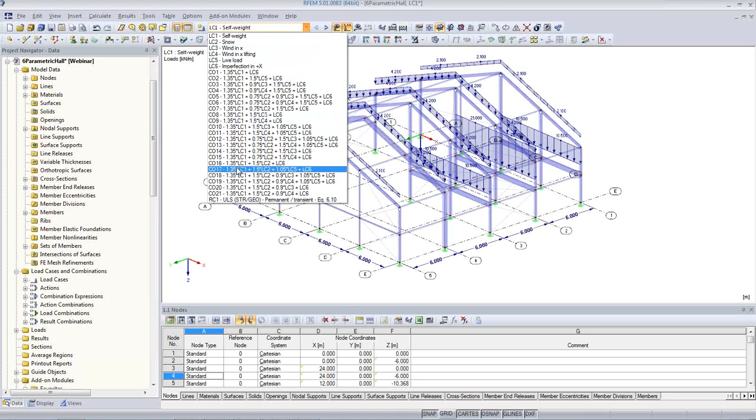Okay, I run the analysis here. I have 6 load cases, also including imperfections like drift and camber. And I'll run the combination 16, which is self-weight, snow, and an imperfection, and I run the analysis.

When I do this, sometimes if you work with finite elements, you see that there are problems with stability. It's a non-linear analysis, theory second order, we check also stability. And I get a warning that something went wrong, but I don't know what is wrong. There's an instability in here, but I don't know where the problem is. So how to find it?

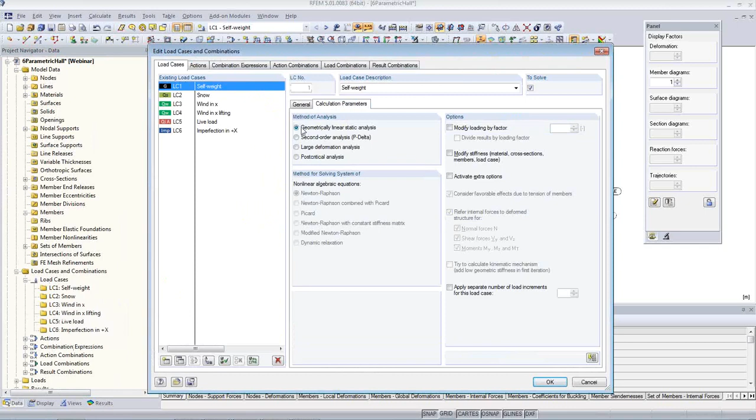Well, I can try to run a load case on a smaller load level, for example, self-weight. If it is a stability problem, I can start with a linear analysis. Basically, typically in our software, load cases are linear. You can set it up as you like, but by default, we run them as linear. So you can set it up, load case 1, calculation parameter, geometrically linear.

Okay, so the model is connected, it works fine, it's there, but it's a stability problem. Second order theory gives me an error. So how to find it?

You can use the additional module RF Stability for this, and I start it, and I analyze an eigenvalue. I analyze based on load case 1 the eigenmode of this structure.

I import the actual forces of load case 1 into this eigenvalue solver. I run the analysis of 4 eigenvalues, and I get a critical load factor, which is the factor that I can apply to this load case, which was the basis of my analysis. I can basically linearly extrapolate 3.169 times the load on this structure that I have now in order to be stable. This is one number that shows me how far I am away from instability, from the point of instability.

But I still don't know what's the problem. So for this, I have to look at my shape, the eigenvector mode. And you see here, there is some column that's bending for the first eigenvector; for the second eigenvector, it's also here on the other side.

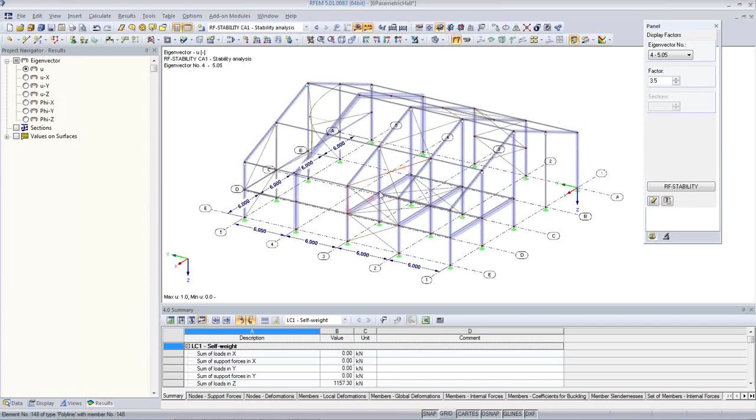And the third mode is here, the fourth mode is here. So this is most likely where I have a problem, because to this critical load factor, this mode belongs.

Okay, what I'll do now is I'll select, I go to the cross sections here, and I have a list of cross sections, and I select one of these members columns that bends. I use my synchronization, I see all those failing members are made from the same cross section. If I change the cross section to 200...

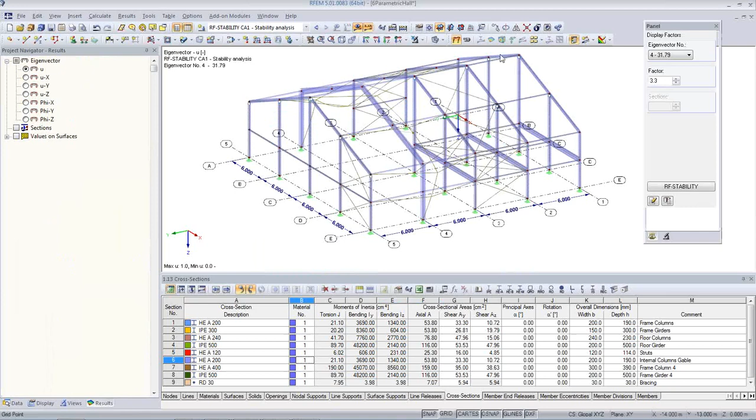Then I want to see the effect of it to the critical load factor. I run the analysis again, because now this first failing mode should not appear anymore, because I made the cross section bigger. So what we see now is a much higher eigenvector, a much higher critical load factor, and also a different failing mode.

So now if something fails, it goes this direction at a load factor of 28. Then we have the other critical load factor, which is the typical buckling mode of the frames. And the third one, here we have this column. So at 31 - before it was 10 times higher load factor, now by increasing those columns.

And now I can try if I can do also my second order analysis. So I run this load case 16 and get my results, and now there should be no more problem. So by using...

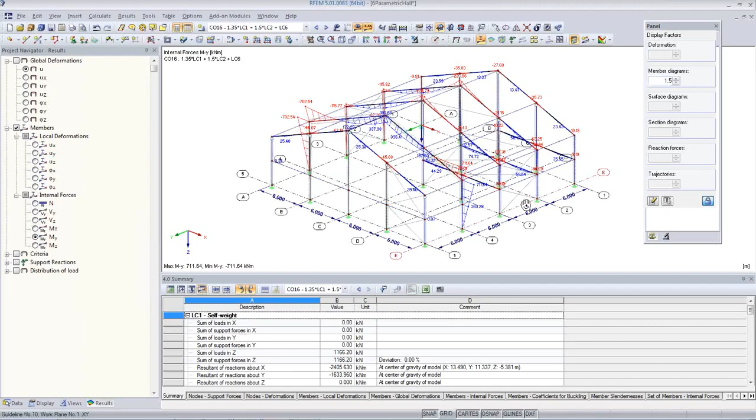this stability module, I can find the problem, the location of my problem. If I get a stability message inside the software, I typically do not know where the problem is, but with the use of this eigen mode and the RF stability module, I can find this, and it can tell me more about the stiffness distribution in this structure.

Okay, another final small example I have here with the plausibility check. I started with a small example. I will end with a small example.

Again, we have this, looks like the same frame like we had at the beginning. Everything looks just fine. I have a self-weight load case here. I run the analysis and I have a problem: the stiffness matrix is singular, structure is unstable.

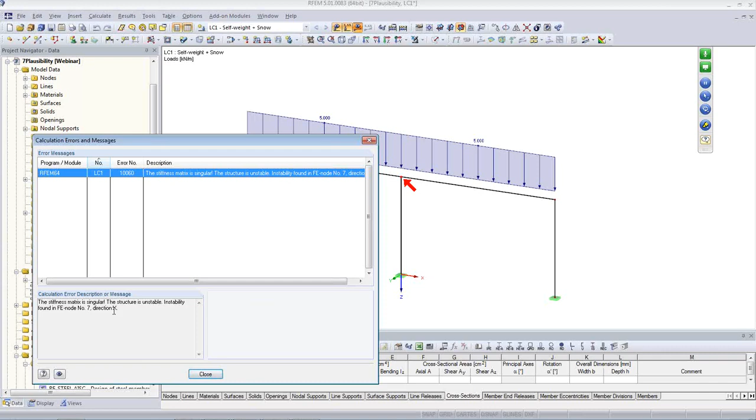Well, the good thing about it is RFEM tells me with an arrow where maybe the problem is, and I can go and look - that's one good thing. I already get the degree of freedom, direction X, and the node, the finite element node. So here, but I don't see anything, looks still okay. What's the problem?

For this, I can use the plausibility check or the model check. And I have several features here. One is to find identical nodes. Here I can set a tolerance where I find identical nodes. So if there are nodes that are lying close together, that can cause a problem in meshing, or maybe I'm not aware that there are two nodes that are close together, I can find it.

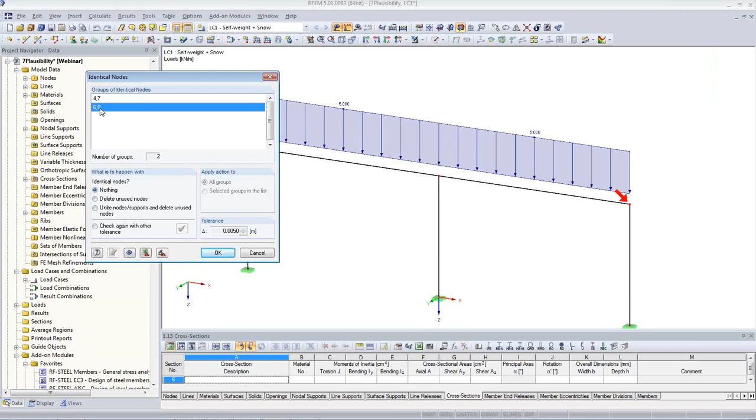In order to find the problem here, I change the tolerance to 5 millimeters. And I check it now, and now I see there are groups of identical nodes. And I can now do nothing with it, or I can say, please create visibility of each group. So the selection here, those nodes will be put into a certain visibility. 2 new visibilities have been created.

I go to Views, Visibilities. So now I can select nodes 4 and 7, which are here. And I see, if I press isometric view, I see that there is a big difference. Now it is - I change the visibility. Okay, and you can see here is the problem.

In here. So I have to go down closer, and I see here now there is a problem. We have the coordinates, we have 1 millimeter of difference. And the same is on the other end of the structure, where we have here the same problem. Okay, how to solve it?

I can either drag and drop the node. Also, not every software can just drag and drop such a node and connect it this way. Or I can use again the tool, model check identical nodes.

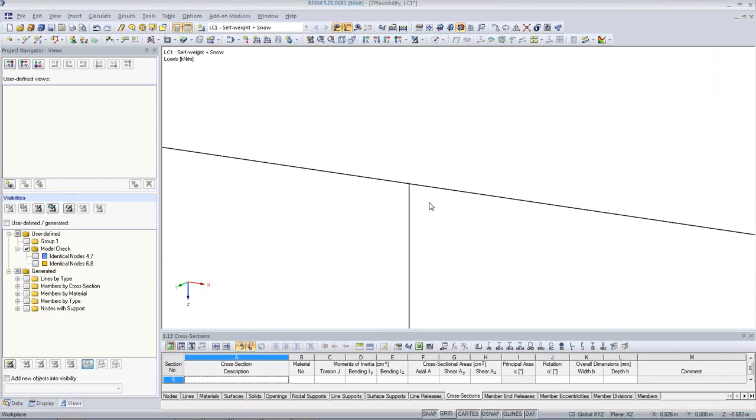Check again, and here I can use unite nodes, supports, and delete unused nodes. If I check this option and click apply, you'll see how it connects automatically. RFEM saves you a lot of time finding modeling errors that can occur, for example, when you import from a not-so-perfect DXF file, or when you're modeling rapidly with a big model and you have to find those little problems. You have tools that help you find those things.

Okay, this is what I wanted to show you today in this webinar. We've seen the rapid generation of FEM models from 1D beams. This way you can handle steel details in a very fast and effective way. You can solve problem zones where beams are not enough.

We also saw parametric modeling, how to model simple structures and parameterize them. It's a great way for fast and flexible reaction to changes. You save on buying other software because you can handle big and small problems inside RFEM, and you have an all-in-one solution because you use one software for all your problems.

Also, we saw how to create intersections and how intelligent those objects are. They change intelligently after you change the parent object.

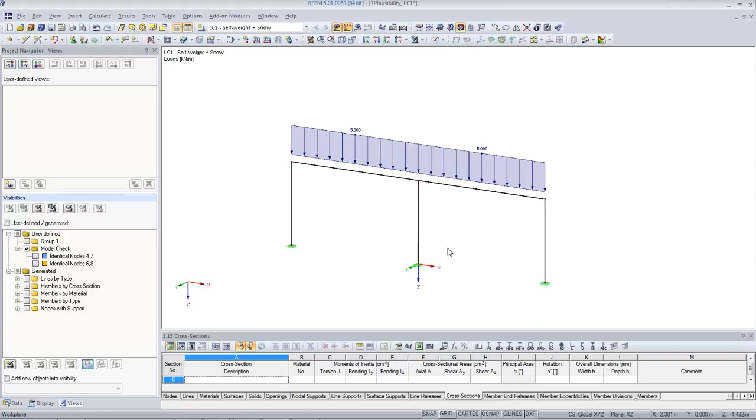RFEM is not a scientific software. It has a lot of powerful solvers and scientific solutions inside, but it's made for engineers and daily practice work, not so much for scientific use. So it includes all those things we have seen here, and I think it will increase the productivity of solving your engineering problems, rather than dealing with facts like modeling and how to get coordinates and measures. RFEM can really help you with this.